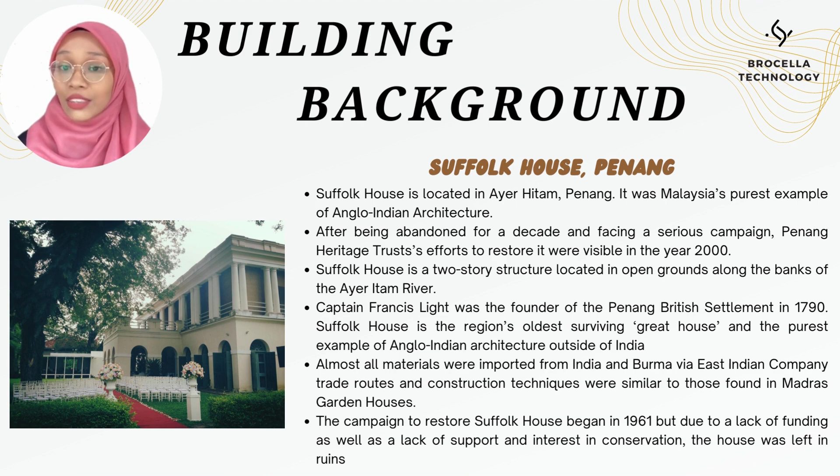The campaign to restore Suffolk House began in 1961, but due to a lack of funding as well as a lack of support and interest in conservation, the house was left in ruins.

As we can see in this table, here we state the first risk identification that we identify, which is while doing preparation of material. Here we state three hazards that could occur while doing this preparation.

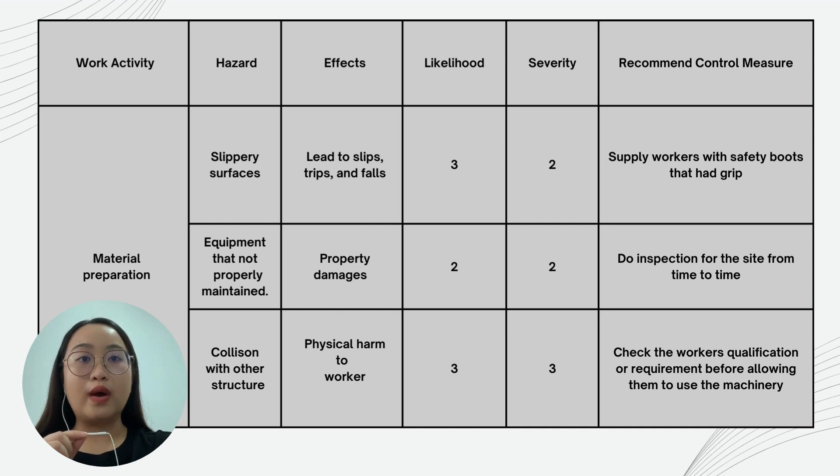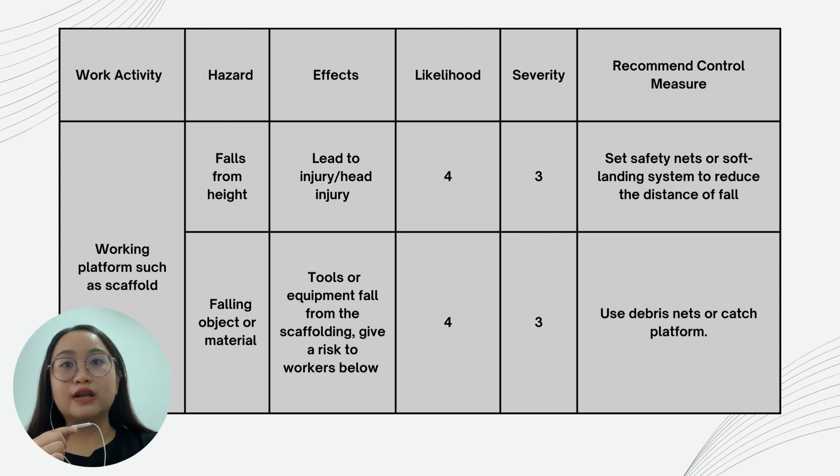Next, the second situation is while on working platforms such as scaffold. Here we state two hazards that could occur: first, fall from height, so we suggest setting a safety net or soft landing system to reduce the distance of fall. The second hazard is falling object or material, so we suggest to use a debris net or catch platform.

Next activity is while carrying material. Here we have three hazards that could occur in this situation. The first is slip, trips and fall. While carrying material can obstruct vision and increase the risk of slipping, tripping and falling of the worker.

So we recommend to enforce the use of safety equipment on the site. The second hazard that could occur in this situation is overexertion and fatigue. It is because carrying large or bulky objects without rest might cause tiredness, so we suggest a scheduled regular break to give workers time to rest and recover from physical exertion.

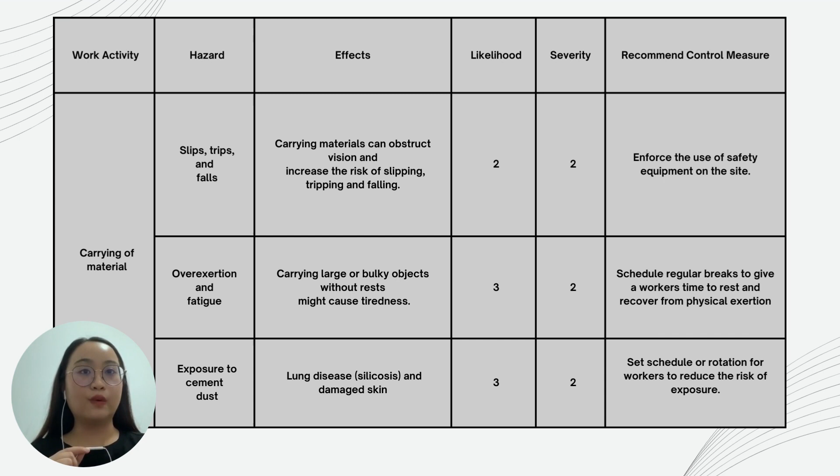The third hazard that could occur is exposure to cement dust. It will affect the lungs, causing disease, and damage skin. So we recommend setting a schedule or rotation for workers to reduce the risk of exposure.

I will continue Roran's presentation. For the next risk is the risk in plastering work. There are three hazards that we have identified. The first one is slashing wet plaster that can cause skin irritation. The likelihood of this happening is 2 and the severity is 2.

So we recommend to set a schedule or rotation for workers to reduce the risk of exposure. The second hazard is noise exposure. This can lead to hearing damage over time.

The likelihood of this happening is 3 and the severity is also 3. So we recommend setting a schedule or rotation to avoid prolonged exposure to the noise.

The last hazard is dust pollution, which can cause problems in the respiratory system. The likelihood of this happening is 2 and the severity is also 2. So we recommend the use of dust control equipment such as a vacuum, or washing down the dust with water after the dust-generating work is done.

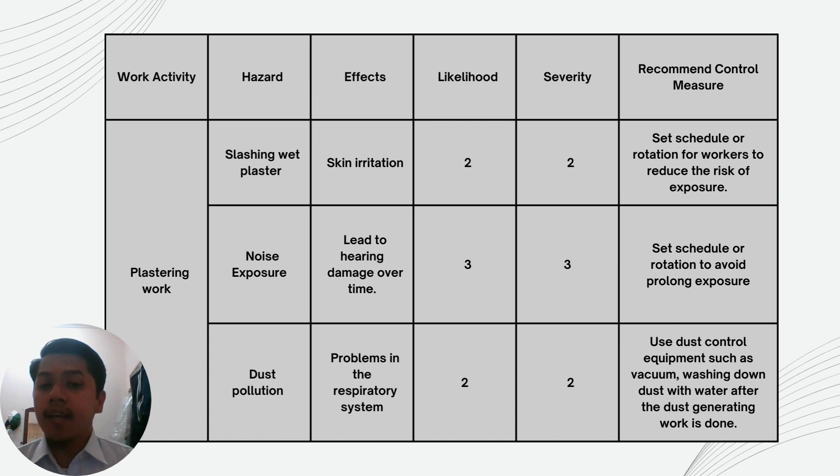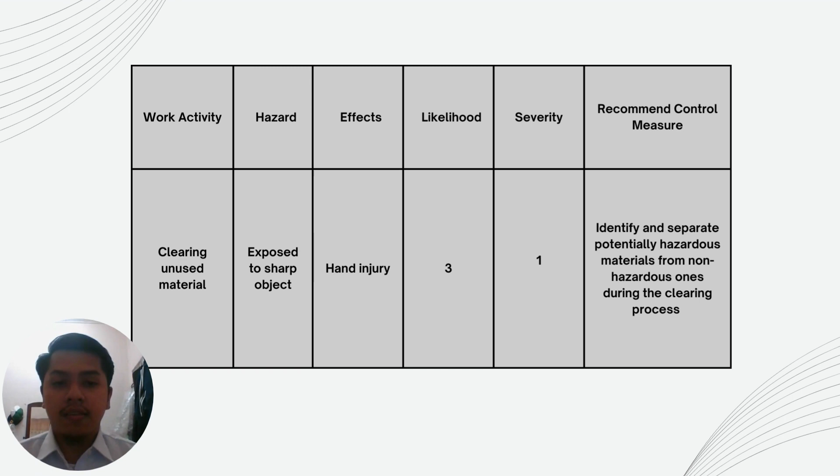The next work activity and risk we identified is clearing unused material. The hazard involved is exposure to sharp objects, which can cause hand injury. The likelihood of this happening is 3 and the severity is 1. So we recommend identifying and separating potentially hazardous material from non-hazardous material during the clearing process. That's all for the risk assessment.

Next, we will go to the risk treatment. For the risk treatment, all the risks except the one with the red color matrix have to be mitigated, while the risk with the red color matrix must be avoided.

The first treatment option we suggest is to study and follow ways for boosting workers' safety at construction sites as much as possible, without affecting the construction plan in major ways. The benefit is that it will mitigate most of the risks related to the workers that have been identified. The disadvantage of this treatment is it will increase the duration of the project and also increase the cost. But the result of this treatment option is yes.

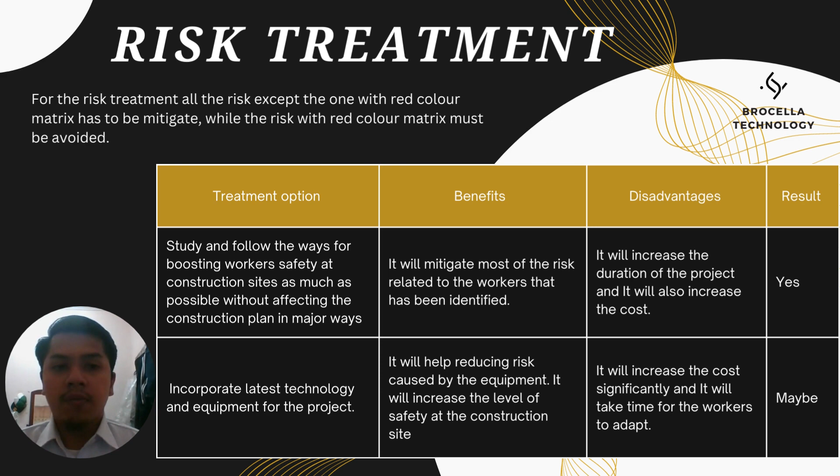The second treatment option is to incorporate the latest technology and equipment for the project. The benefit is it will help reduce risk caused by the equipment and increase the level of safety at the construction site. The disadvantage is it will increase the cost significantly and take time for workers to adapt to the new equipment. So the result of this treatment is maybe.

The last topic for this chapter is the legal acts, statutes, and guidelines for risk management. Here are the guidelines or legal acts we use. The first one is the Environmental Quality Act 1974. The reason we use this act is because the project involves not only the building, but also the surrounding area.

The second one is the Occupational Safety and Health Act. This is because the safety and health of the construction worker is essential for any construction project. The third one is the Uniform Building Bylaws, which is also essential for any construction project. The fourth one is the National Heritage Act. The reason we use this act is due to the age of the building.

An Emergency Action Plan is a written document necessary to comply with the specific Occupational Safety and Health Administration (OSHA) requirements. Creating an emergency action plan is an effective way to safeguard employees and companies in an emergency. Its main function is to coordinate employer activities during emergencies in the workplace.

A facility will sustain fewer and less serious employee injuries and less structural damage during an emergency if it has a well-developed emergency plan and enough staff training for emergency plan actions. The emergency action plan aims to offer guidelines and strategies for reaction in an emergency case.

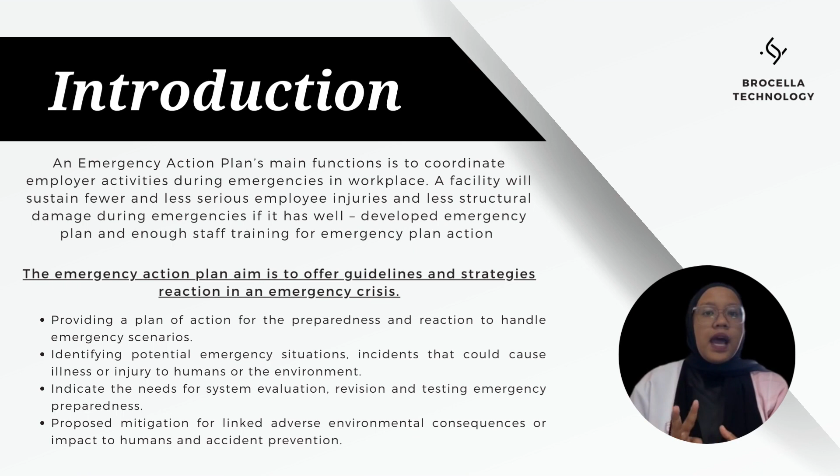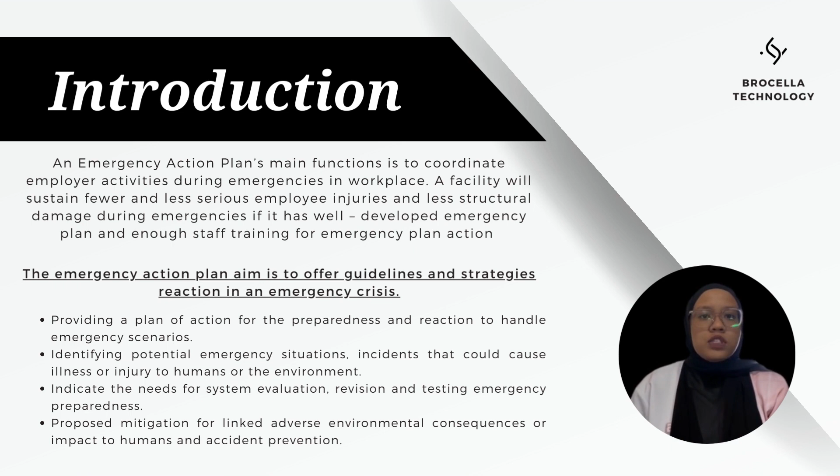There are also several purposes in creating the emergency action plan: first, providing a plan of action for preparedness and reaction to handle emergency scenarios; second, identifying potential emergency situations or incidents that could cause illness or injury to humans and the environment; third, indicating the needs for system evaluation and testing the emergency preparedness and response process relevant to the emergency scenarios; and lastly, proposing mitigation for linked adverse environmental consequences or impact to humans and accident prevention.

There are several possible issues and problems that may occur during the restoration project's ongoing works. For example, historic preservation — due to historical significance, rules, and requirements, there will be challenges to maintain the historical features. Next, the cost and budget used to restore an old building due to repairing defect costs and other hidden costs. Besides that, building code compliance — the building did not follow the most recent rules and guidelines, especially regarding safety, accessibility, and energy efficiency. There are also possible issues and problems in water damage, materials, and craftsmanship.

There are also numerous hazards and risks present during the restoration of an old building. For example, leaks on the ceiling and roof are common issues in restoration of old buildings. Next, the hazard of pests and termites, which needs to be treated before other restoration activities are done. The third possible hazard is unexpected damage and hidden problems.

During the restoration process, unexpected damage and hidden problems may be discovered, including hidden structural damage, leaks, termite infestations, and electrical issues. Possible issues are excessive moisture and cracking. Cracking may initially appear to be a minor issue, but it can actually be an indication of a serious underlying condition that has to be fixed as soon as possible.

Next, the Standard Operating Procedure (SOP) for Emergency Action Plan. This SOP procedure is to provide clear guidelines and instructions to all project stakeholders to comply with in the event of an emergency, specifically in relation to incidents of structural failure during an ongoing restoration project. This SOP applies to all individuals involved in restoration projects, including project managers, contractors, employees, and other relevant personnel.

For roles and responsibilities: first point is the emergency response team. Establish a designated emergency response team responsible for coordinating and implementing emergency response plans, including incident commander, evacuation coordinator, security officers, and first aid providers.

Second point is communication relations. Establish a communication liaison responsible for communicating with emergency services. Third point is project stakeholders. All individuals involved in this project should familiarize themselves with their roles and responsibilities during an emergency and follow the instructions provided by the emergency response team.

For emergency response procedure, first is the activation of the emergency plan. Upon becoming aware of any structural failure occurring in the project site area, any individual shall immediately inform the emergency response team or designated incident commander to activate the emergency plan, including initiating the alarm.

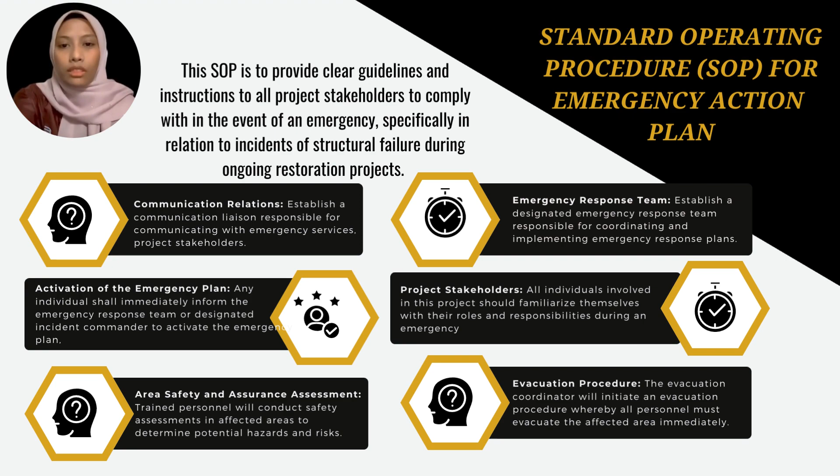Then the last point is area safety and assurance assessment. The trained personnel will conduct a safety assessment in the affected area to determine potential hazards and risks. The incident commander will coordinate with security officers to implement measures to secure the area, such as using barriers, warning tapes, or fences. Next, for emergency preparedness or response action plan for structural failure incidents.

The response action plan is to outline the steps and procedures to be followed in the event of a structural failure incident. The plan aims to ensure the safety and well-being of staff and minimize further damage or injury.

Point four, risk assessment and design. First point is identify potential hazards. Conduct a thorough risk assessment on the project to identify potential hazards and areas exposed to structural failure, as well as consider factors such as structural age.

Next point is emergency response team. Establish an emergency response team consisting of trained personnel. The third point is communication plan. Develop a clear communication plan to ensure effective communication among project stakeholders during an emergency.

Next point is evacuation plan. Provide a detailed evacuation plan that includes evacuation routes, assembly points, and procedures to safely evacuate all personnel from the affected area. Then the point for emergency response procedure.

First point is incident response. Establish a protocol for immediate response to incidents of structural failure. This may include actions such as activating an alarm.

Second point is safety assessment. Ensure that trained personnel carry out safety assessment in the affected area after an incident. Next point is securing the area. Implement measures to secure affected areas and prevent unauthorized access. This involves the use of barriers, warning tapes, or fences to restrict entry and protect individuals.

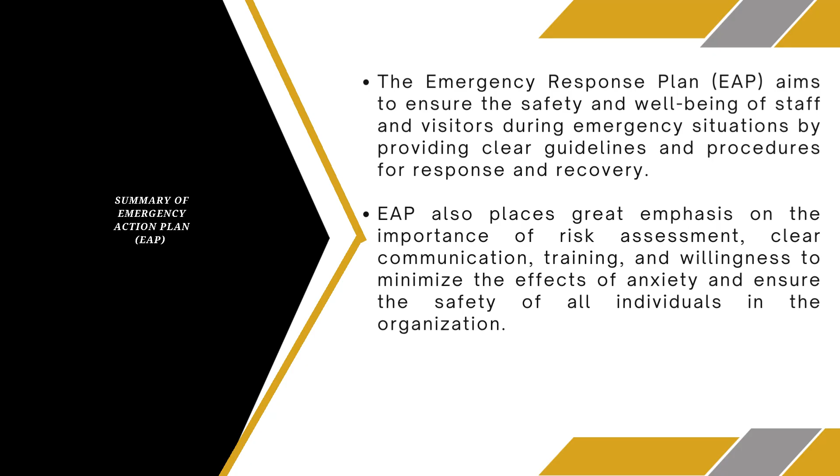In summary, the emergency response plan aims to ensure the safety and well-being of staff and visitors during an emergency situation by providing clear guidelines and procedures for response and recovery. This emergency action plan places great emphasis on the importance of risk assessment, clear communication, training, and willingness to minimize the effect of any incident and ensure the safety of all individuals in the organization.

In conclusion, Suffolk House, being a place that can attract tourists, a restoration of Suffolk House is a valuable thing to do. The risk assessment process is also important to make the project go smoothly. Emergency preparedness must also be prepared for every site to make sure any emergency incidents can be handled.

The restoration project's impact extends beyond the physical restoration. Suffolk House can be an important cultural and historical site in Penang that can attract tourists in exploring the rich history and experiencing the colonial ambience.